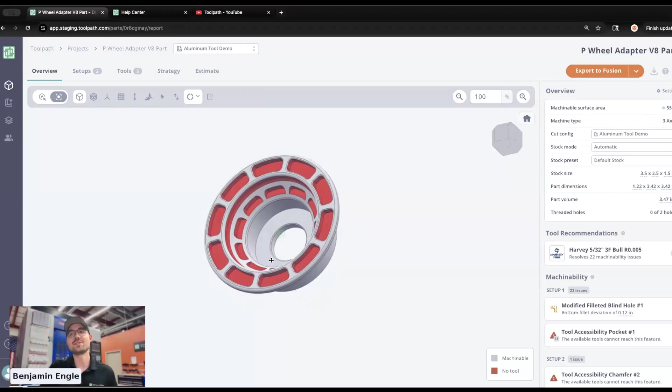But what Toolpath has also done is given me some recommendations. If I click on this, in this case it's a Harvey 5/32 bull nose, it resolves 22 machinability issues, which we can see highlighted on that part. And if I add that to my cart and regenerate, that part would go from 55% all the way to 100. So Toolpath is getting us the rest of the way there and identifying what tools are required.

So we figured out, can we make this part with our tools? The next question is, how am I going to make this part? So here I am in the setups tab, and if I click on these icons, these rotate my part into each setup.

Let's take a look at setup 2. I can see all of the features associated with each setup, and if we click into this face, it gives me an overview of the features. Now in this case this is just a face, so we don't have a feature depth or anything, but I can see what roughing tool Toolpath decided to use, as well as my finishing tool.

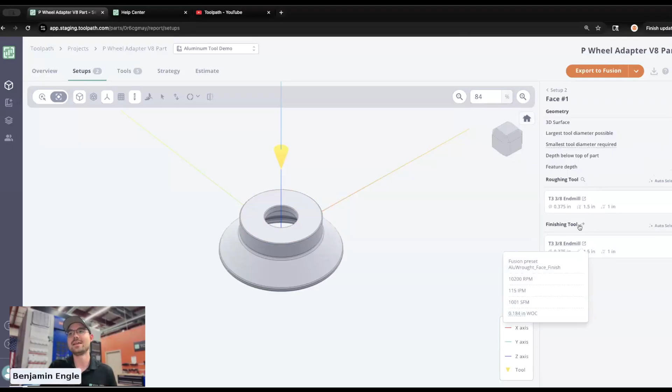And we're picky machinists, so maybe I don't want to finish with a 3/8 end mill. Maybe I actually want to use my 2-inch shell mill, because Tim would yell at me if I used an end mill to finish with, right? So I can actually tell Toolpath that I want to manually override that. In this case I'm not going to, because we'd have to click regenerate, but there's always that ability.

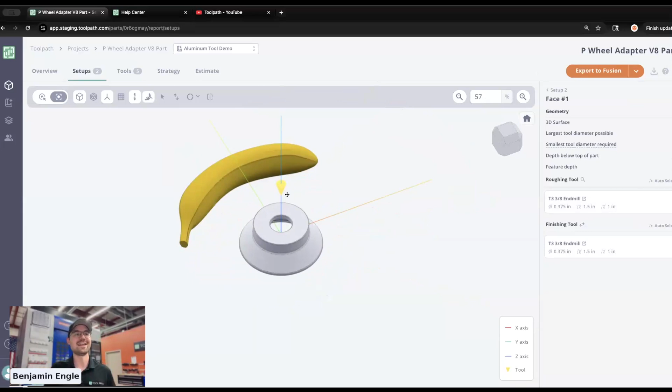And of course, we were talking about banana for scale. This is something we threw in during April Fools, just for one day, and then the next day we took it out of the product. Everybody was like, where'd the banana go? So that's sticking around. We even made a shortcut key, BS - if you type in BS, you can toggle on and off that banana. It's way more useful than you'd think, and it also gets a couple laughs, so I figured I had to show that.

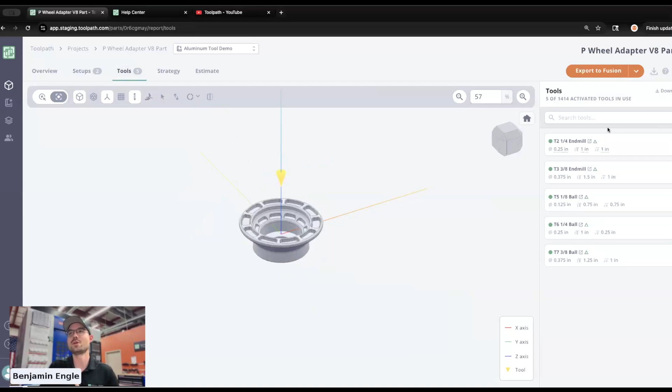Okay, so if we jump over to the tools tab, now we have a tool list of everything that is required to machine this part. And what I like to show here is we have over 1,400 tools available to us, but Toolpath is only using 5 tools, and it's using our preferred tools.

So that means that top priority, that preferred tool, means that it's already set up in my machine, which is really what I want to know, so I can make this part today.

If we jump over to the strategy tab, this is really similar to what you'd see when programming in CAM. We always take the tool and try to condense all the features down for one tool. Toolpath has already done that. We've got this 3/8 inch end mill. I'm going to expand roughing and see that we have 9 features that take about 6 minutes to machine, and Toolpath is hitting all of these features with this roughing operation.

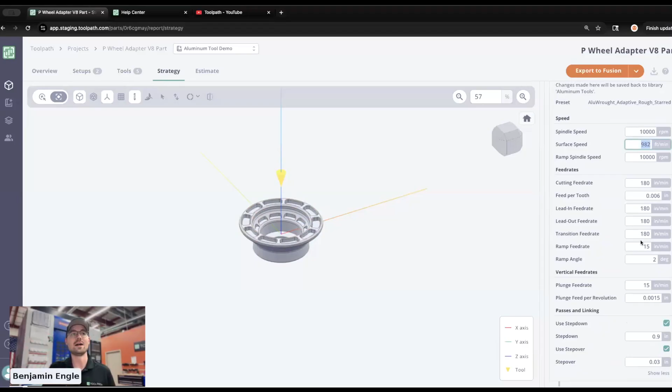Now, before I even send it to Fusion, it's pretty slick — I can actually change my spindle speed. Maybe I'm not happy with that surface speed for whatever reason. All these parameters, which look very similar to Fusion, you can change, and it will actually update that tool globally. So you don't have to worry about going back into your tool library and editing that parameter.

So that's a really nice feature. Okay, so the final tab is our estimate. If we have to get an accurate estimate for an RFQ or for our customer, this is where we're going to do it. The estimate page is really just a natural byproduct of everything I've shown you in Toolpath so far.

We know what tools we're using, we know the feeds and speeds and stepovers, we know how many setups. So now we can apply the machining time, and we can associate a cost with that.

And that cost is actually built from your shop, right? So on the left-hand side, we can see we have machining rate — that's going to be different for every shop, every shop's a snowflake. The production quantity that's required, as well as setups. We can define how much it's going to cost for each setup or an hourly rate, as well as a fixed or auto for the stock.

You have base costs — I don't want to take this job for anything less than 150. And you can also add additional costs like anodizing and maybe sandblasting fees or something like that.

So here on the — I need to move my Zoom stuff — here on the right-hand side, we can get a grand total, and this is based off of the machining time.

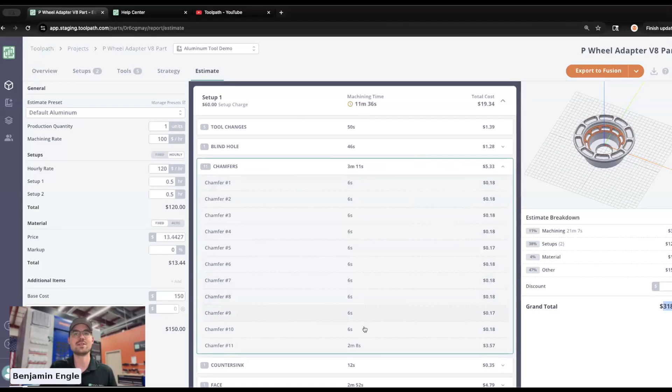So I can see in the center that setup 1 — let's just look at chamfers. Okay, chamfers are 3 minutes and 11 seconds, and that's going to cost me $5.33. But why are they 3 minutes? Well, these are all 6 seconds. Mostly chamfers are pretty quick, but we can actually see this chamfer 11.

It's this 3D surface, right? So it's picking that up, it's using our ball end mill. That's going to take an extra bit of time to machine. So you get a nice breakdown for the estimate there.

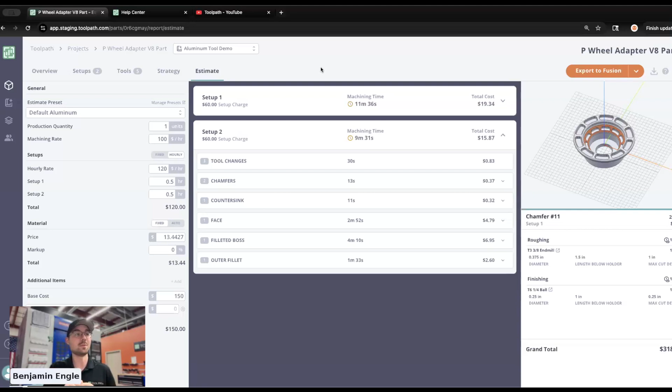So we've been able to answer what tools are required for the job, how am I going to make it, right, with the setups. I got to show you one more thing in setups — this is a preview feature, but it's super cool. We're picky machinists, and say we don't like the setup that Toolpath picked, I can literally just drag and drop.

So now this setup is actually my first setup, and I can just regenerate that. It's coming really soon, I'm excited about it. People have been asking for a while.

So, okay, so this is Toolpath, but I got to show you my favorite button — it's export to Fusion. So we're going to click on this. It's going to copy a special link to our clipboard. And I just realized you guys can't see Fusion, so now I got to stop share.

Thanks for working with me on this, guys.

All right, let's see — I'm going to have to share my whole screen for Fusion because you guys won't be able to see stuff otherwise. So here I am in Fusion. We have a Fusion add-in that lets us either send our part to Toolpath or bring it down into Fusion from Toolpath, and that's what I'm going to do.

Hey Ben, I'm not seeing it yet. Sorry about that, should have clicked share. Yep.

Again, here's our add-in that lets us either shoot the part to Toolpath or bring it down, and we're going to bring it down in this case. So I'm going to click part.

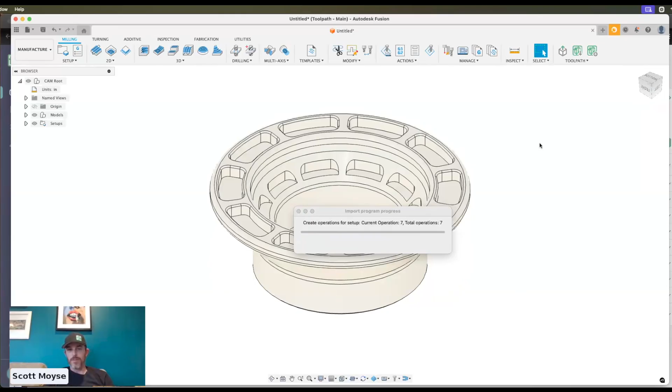Just for people, if you need to zoom in, here's a crazy tip for Zoom. Ironic given the name of the product, but if you click in the window that Ben's sharing, you can actually zoom in. There you go. I'm sorry, guys, I'll get rid of the widescreen for the next webinar.

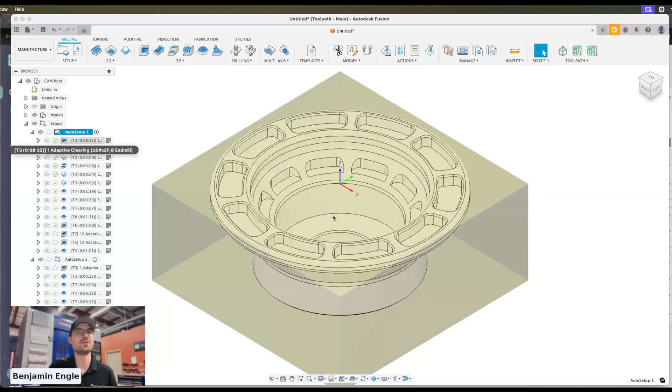So what Toolpath has done while Scott was talking is, in a few seconds, it brought everything I just showed you guys in Toolpath into Fusion. Here's our setups that have been auto-populated for those toolpaths. So we can see all of our operations. In this case, we got a 55% machinability score, so there's going to be some issues, but we were still able to send that to Fusion. And now since it's in Fusion, I have full editing capability of it as well.

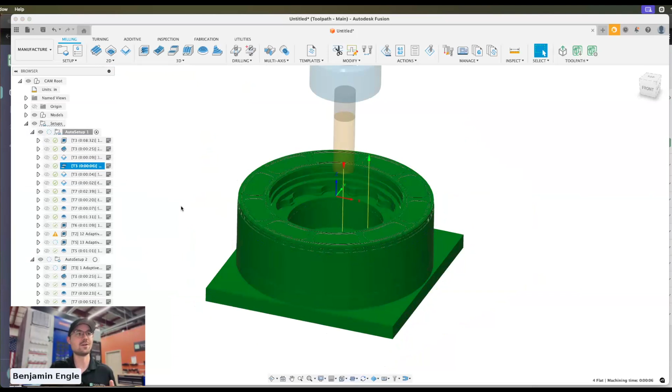So that's kind of a quick rundown. Hopefully you guys have a better understanding of how Toolpath works. There's a really fun story with this part, that's why Tim's on the call, and he's probably really eager to tell you guys all about it. So Tim, I'm going to shift it over to you, and you can give us the story on this part.

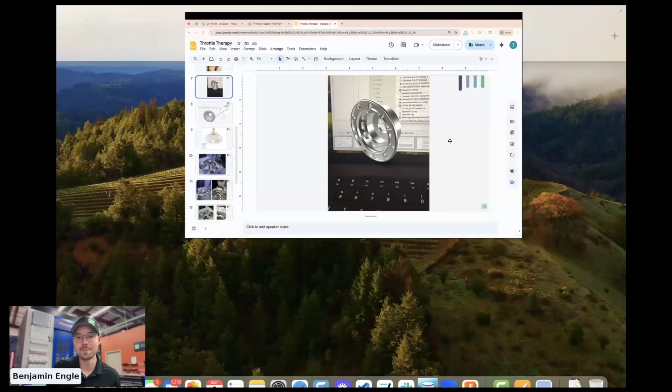Yeah, so I'll drop a little quick slideshow on you because I like pictures, I'm a picture kind of guy. So let me get that started. Ben, just give me a yes or no, the slides are showing, right? Yeah, yeah, you're good.

So this is a good longtime friend of mine from my bike shop days. He's running a race shop now, they basically prep race cars to do a ride and drive kind of program up here in Northern California, Throttle Therapy is the name. He's got some rad stuff they're doing up there. That's not really the point of the story though. He sent me a text: hey homie, I've got an SOS, I'm hoping you can help me with.

The rest of the story is that he has a really nice laser alignment system. When he bought it, he was told this kit will fit every Porsche that ever existed, for the rest of time, beginning of time, all that stuff. They lied, or whatever the case was.

So he needed an adapter to go from this fancy knockoff type lug nut to this. I was like, if I got the material and the tools, yeah, I can knock that out today. I was planning on going out and machining something in my shop to kind of bang on Toolpath anyways. So the funnest part of the story, I'm going to get straight to the punchline: from the first text to being ready to go out to the machine, and that included a follow-up call, several text messages, him taking some measurements, that whole process was like 52 minutes.

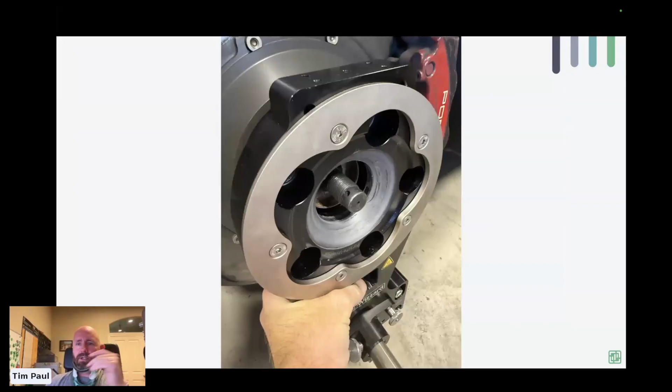Basically we needed an adapter for that. If anybody doesn't know, especially if you're working back and forth with designing parts for customers, I just had a brain fade, Scott Moyse, help me out. In Fusion you can save out as a U something, USZD or something.

What is this, Scott? Help me. Something, yeah, U3Z or something like that. It's just, I forget, hang on, anyways I'll find it, I'll show it when I get to Fusion. You failed me Scott, I'm moving on. USZD or some crap, I'll pull it up in Fusion in a second.

But it's pretty cool, you can send someone a file, text them, they got to be on an iPhone. USDZ, thank you Daniel for the win. You can send them the 3D file, they can open it on their phone and place it on here on their laptop, right? So that was just a fun little part of the story.

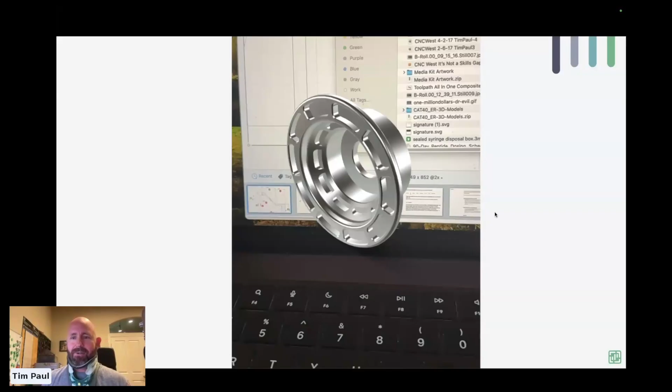I ran this thing through Toolpath. I mean, I designed the thing, so I know what tools and material I had, so I got 100%. This was the beginning of some of the tool paths.

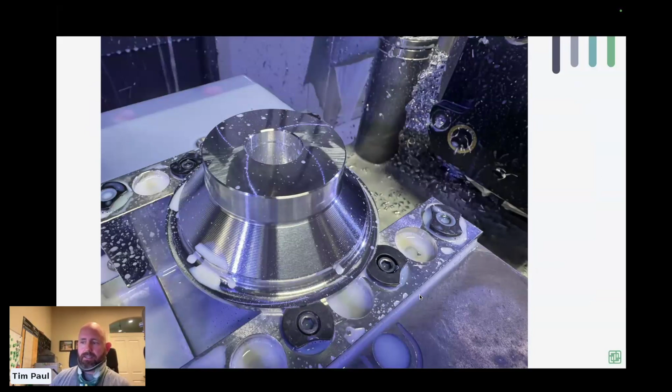I held it in my Chick OneLok vise with Versa grip jaws. Apparently I'm getting nervous because John Saunders is on the call, just kidding. So I held it with some Versa grip, little Mitee-Bite grippers.

And then flipped it over for the soft jaw on the other side. I probably had more time into finding this little logo for Andy's business and playing with the logo in the pocket than I did the rest of the part.

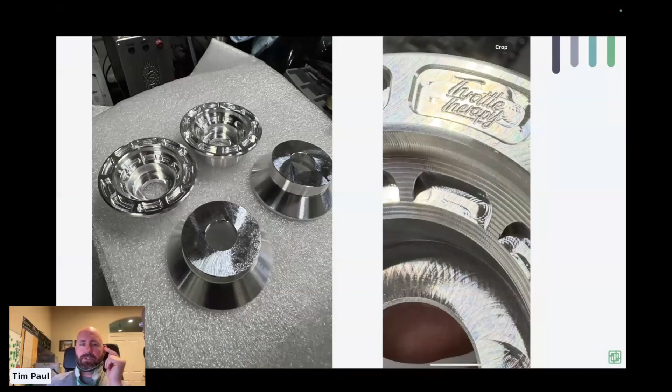But the really interesting part of the story for me, this is what they do. This is how they adapt the laser alignment fixtures, and that's the car. So let me get over to Fusion and start talking about the rest of the story.

Now the interesting part of the story for me is 52 minutes from a text message to being ready to go out to the machine. I still can't load tools in my holder or run my machine. For anybody that doesn't know, I had a real serious accident back in April. I busted my neck and back up pretty bad and dislocated my head.

Lucky to be alive, but I wasn't able to run, and I'm still not able to run my machine. So Carol, my fiance - anybody that didn't know that, that's breaking news - she's been running my machine. So I was like, Carol, let's go make some parts. And she said, man, it's almost 100 degrees in the shop.

So the only thing that kept this thing from being done start to finish in probably 2 hours was that we wanted to wait till the next morning to machine the part.

And the interesting dynamic for me was that I've made a really good living for quite a few years basically micromanaging toolpaths, making toolpaths cooler than anybody else's. And then now that I'm sitting around waiting for it to cool down, I started micromanaging these stupid toolpaths.

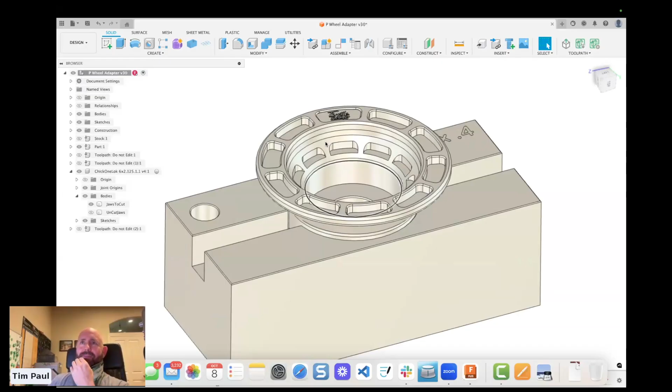This is a conversation that John Saunders and I briefly had, a comment he made was that it's interesting - the first instinct is like, well, I want it to program just like me. But it doesn't always do that. We make some logical decisions. A lot, to be honest, are decisions I've kind of made as a starting point for how Toolpath is going to machine parts.

And what I found is I started rebuilding surfaces and doing really dorky 3D Toolpath stuff. And then about an hour into that, I was like, what the heck am I doing? I'm just going to go do something else and machine this thing in the morning.

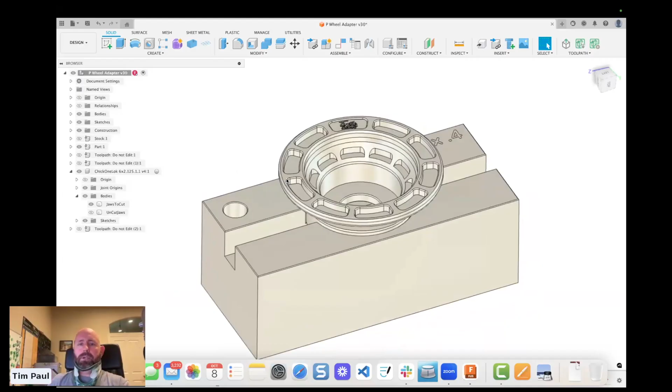So here's a quick overview of the part. We've already seen the part, but the plan was on the first operation, we'll hold it like this in those Versa grips, and then hold onto this in the second operation with some soft jaws. If there's time at the end and anybody wants to see my soft jaw workflow, we can dig into that, maybe I can do a little geek tips video about it too.

But I thought it'd be interesting to go from here. I'm not going to give you the whole walkthrough of Toolpath, but from here, I have very specific stock that I had to fit this in, so I wanted to show that as well.

Basically, I had this round stock from another job that I had remaining. So I went in and modeled the stock where I wanted it to be, and then I went over to the manufacturing side and just made a setup, because on this example I wanted to micromanage a very specific setup for the first and second operation.

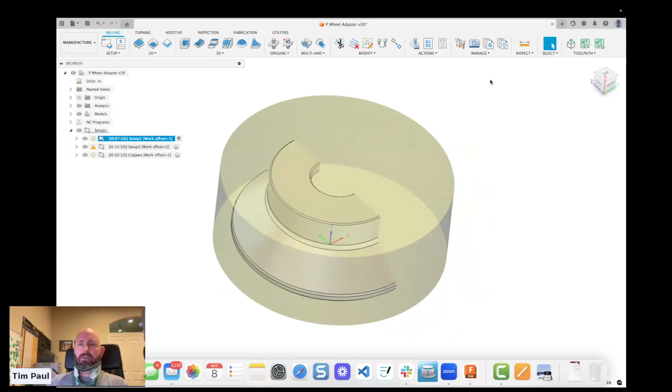So from here, I sent over to Toolpath, and then we can switch over to my browser. And that's not what I wanted to show you. So we don't need to watch this process, right? That's staging - I should be fired.

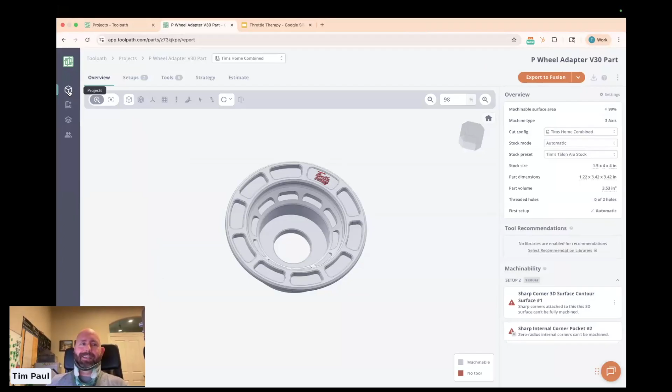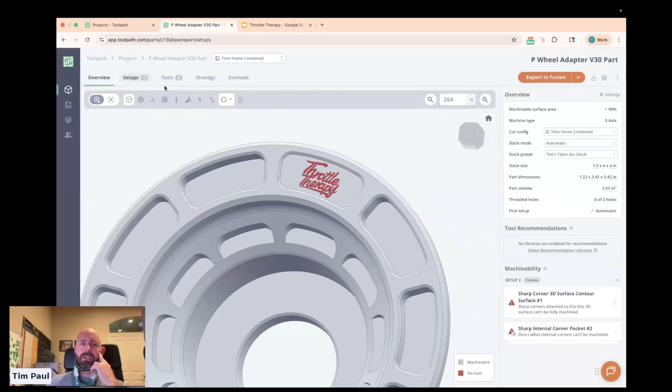So this is what I got here. Because I made this one pocket shallower than the one I sent Ben, and I added some logos there, I'm getting a 99% machinability score. I don't even want to mess with this. It could recommend me a tool for those tiny little features, but I know exactly how I want to machine those, and I know what tool I want to use.

So kind of my workflow is to go to tools. I skim through them, make sure there's no surprises, nothing weird I totally disagree with, and I don't see anything there. You could definitely go through the strategy tab, but Ben already showed you that. There's a little preview that I probably shouldn't have turned on for everybody - pretty soon you're going to be able to see toolpaths from the strategy tab. And then the estimate, it's my buddy.

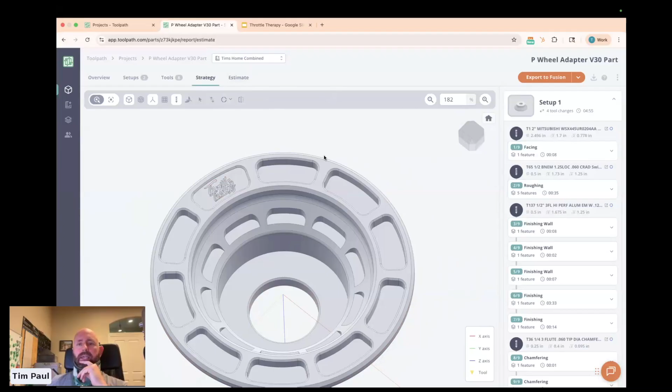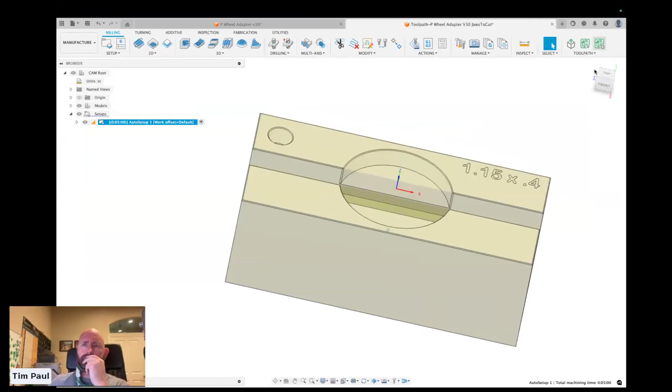So from here, I would export over. Actually, I think I need to grab that export key. Then I would come over here, and the cool thing is I have a decision: I can bring this back into the current document or dump it out to a new document, because I like to play with this separately. I'm going to do a new document. If I was running a job shop, I would just bring it into that existing document. Apparently I grabbed the softjaw key, so let's go back, do the export key here, come back over here and do this. Yeah, I must not have clicked on that.

So now what we're going to do is I'll walk you through exactly what I would do, just to give a walkthrough of the toolpaths. I'm not hiding any little scabs that we have, I'll show you how I would navigate those.

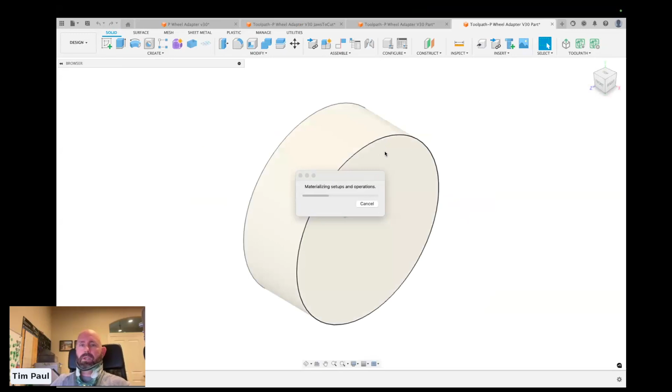And while this is popping in, Scott or Ben, is there anything we want to answer live, or anything you want me to address before I move on? I think we're okay, I've answered the questions I've seen come through so far. Okay, great, yeah, great.

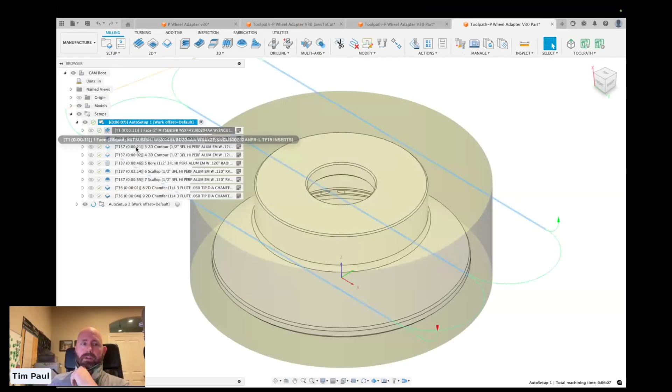So I have this weird Fusion bug that I'll share. Well, of course now that I do it live, it's not there. For several weeks, I couldn't click on these toolpaths without going over to design and then back to manufacture. So if you have a weird bug like that, try that.

So there's a couple things I would do here. The first thing I would usually do is just click down through here. I don't see anything crazy that I don't like, that all looks good to me. So that is very, very close, if not exactly how I'd program the first operation. Next thing I'm going to do is go to simulate the whole setup.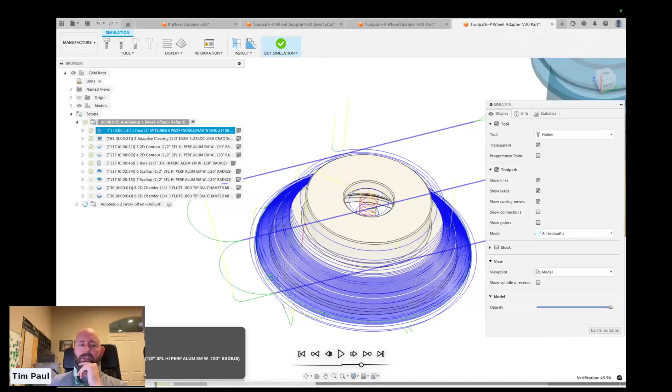And then what I do is I look for little red tags down here in the timeline. I very rarely actually watch the simulation, but I do see a little red tag there, so I'll click on it and zoom in to see what's happening. I see exactly what's going on here.

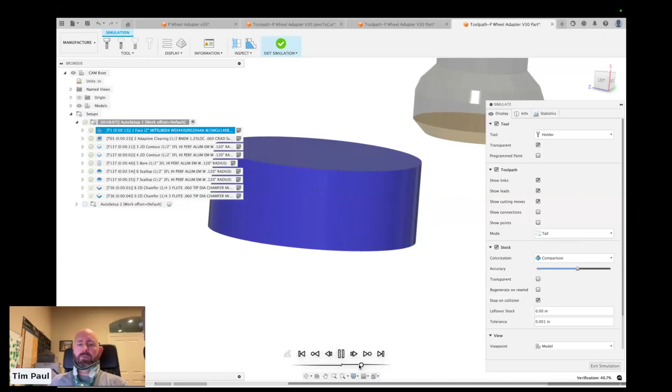So if you do a simulation, turn on stock, I would usually go to tail for the toolpath type. I always turn on stop on collision, but then when you do this I almost always just go full throttle to get to the stop. And what's happening here is we have a bad bottom height on the adaptive roughing.

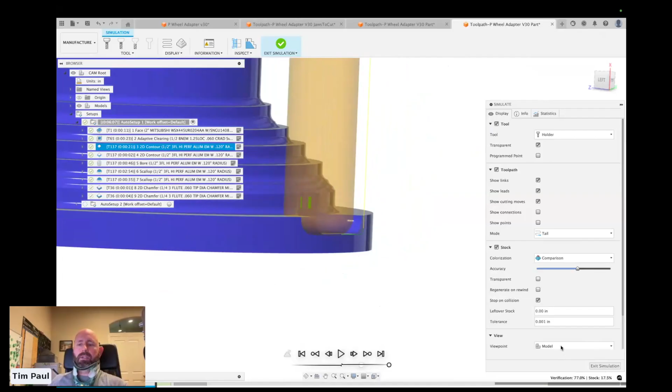I've already recorded that, I've already logged a ticket and that should be fixed here real soon. So that's basically what happened, we're going in to do a... computer seems to be running slow.

So I just need to come into here, and my bottom height is just model bottom. I need to change this to model bottom minus tool corner radius, and I'll do another 10 thousandths of an inch. So hit OK, that'll regenerate.

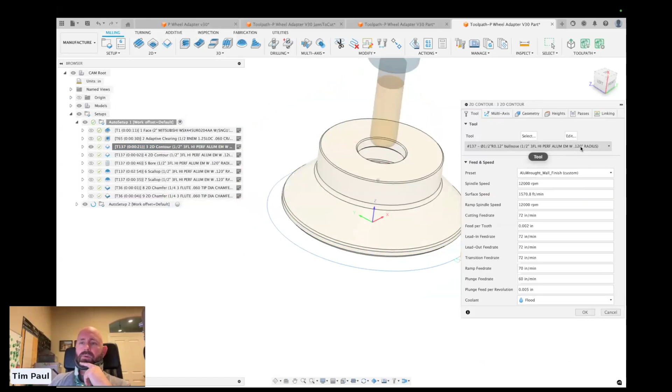But what that'll do is give a little extra clearance to the 2D contour, because the 2D contour is set to the model bottom minus 125 thou. And if we look at the tool, we have a 120 thou bullnose tool, so it's just going 5 thousandths past that, so we'll have a 5 thousandths clearance there. So from there, that side of the part is ready to run.

Now, one little tip is all of our 3D toolpaths for now are being output as scallop toolpaths. That decision, honestly, I pushed on pretty hard for now, because scallop is a really good toolpath to do pretty much any geometry from, steep surfaces, shallow surfaces, segment geometry. So as a starting point, we'll do that while we make sure we're getting good containments, good height containments, good tool selections.

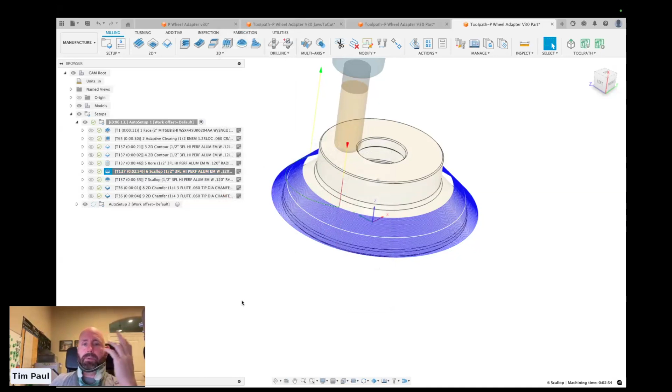And then it's very easy, if you were like 'I would use ramp on that surface,' to just right click on that, create a derived operation, and go to something like ramp or any applicable toolpath. One thing I see is anytime you're machining like a segment of geometry, the smaller the segment is, the smaller your tolerance should be.

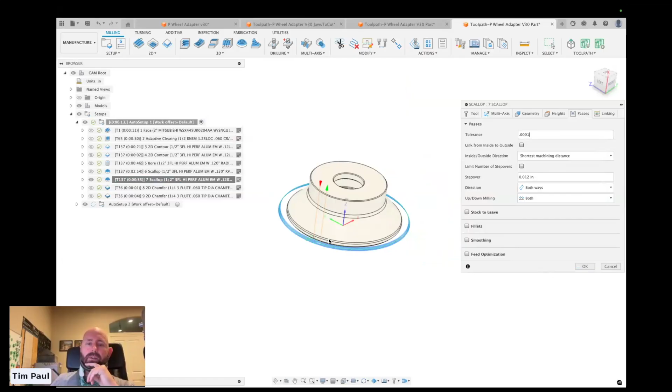So if I'm doing a small segment geometry like that, I would often come over and make my tolerance really small, because it'll smooth out the waviness there. Maybe I want to micromanage and change this to some other toolpath, but if my job is to just get good parts out, then I would just do that and move on.

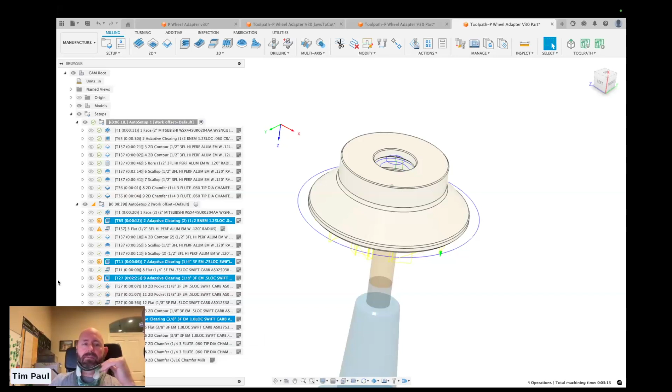Now, what I did do when I went to machine this is I actually wanted a more aggressive toolpath, it's hard to see in the webcam, because I wanted it to look more fun. So I went and made the step over quite a bit bigger.

All right, so moving on to the second operation. I'll pause for a second. I see a lot of good commentary that I want to read, but is there anything we should address before I move on, Scott or Ben?

We've got some hand raises. I'm not sure how to address them right now. Do you guys want to speak, or did you just have a question? I'll wait to hear back from them in the chat. We should probably start Q&A, dig in a little bit more. Let me wrap some of this up, share the new features after you're done with that, Tim. Yeah, perfect, let me wrap this up real quick.

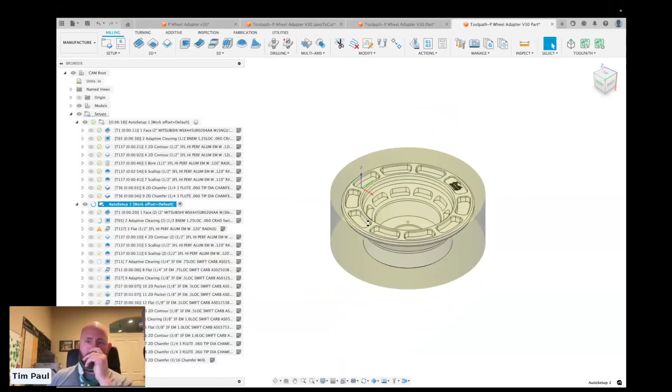So a couple things here, I don't need to go through all the toolpaths. We did have another bug that I found here. We're trying to do this transition as a flat, and it actually machines the full geometry because it uses the scallop that goes all the way up, and this wall comes all the way down. So it is fully machined.

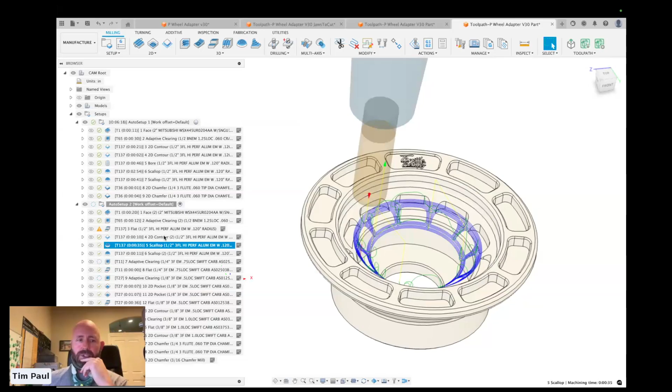But that's basically my workflow, I just go down and see if I see any problems. I would actually delete it, but I'm in the habit of suppressing stuff because I report bugs and problems. So anyways, that's the part.

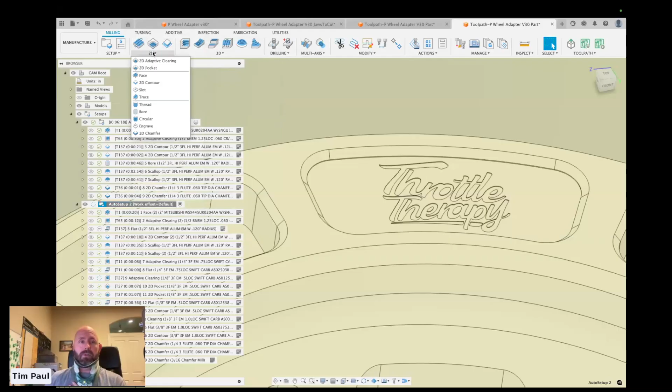For anybody that hasn't used Engrave, that's what I use here. I went to the setup, went to create from template, and then I did this Engrave. Actually, no, I didn't, I lied, that's usually what I do. But this, I use this Engrave operation.

And what I did there is I just picked these and let it engrave. The cool thing with that is you can get these little sharp corners and stuff like that. So, it was a pretty straightforward, simple part.

The last thing, the only other, so I had to add two toolpaths, one for the fancy engraving, and nothing comes off my machine without being fully deburred in the machine. So I did use an extension toolpath, which is deburr.

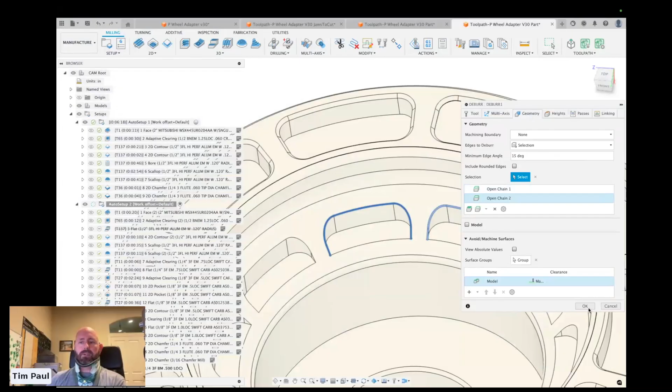I'll just show you real quick how nice and simple that is. I went into a ball mill, picked this ball mill, and then all you have to do is on the geometry tab, I actually selected the chamfers, I just went around and picked them all. And then what that does, it just hits a ball mill and gives a little tenth edge break on them, or whatever you have your default set at.

So that's the story of walking through the part. Now, the big personal moment I had was, like me and many of us in the industry as we're looking to be more efficient and more productive, I need to start thinking through, like, I've been rewarded for hyper micromanaging toolpaths. And now, this made a very good part. It was 2 hours total to make 4 parts from design, from the first text to the finish. And I spent an hour waiting for it to cool down, micromanaging toolpaths. I ended up deleting all those and just running the part.

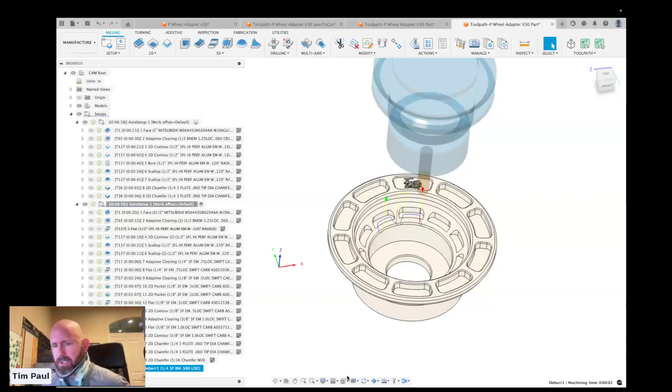Yeah, so I'd like to answer any more questions that people have. So I can't see the comments anymore. Yeah, I'll watch them. But I also wanted to show some of the new features that are maybe a little bit more power user setting stuff.

Looks like Joshua raised his hand. I'll let you guys deal with that. But so if I jump into cut configs, Joshua, if you raise your hand, you disappeared off my screen. Joshua, if you raise your hand, I'll allow you to talk. Oh, there we go, yeah, go for it. What's up, Joshua? There you go. Asked to unmute, so you got to unmute yourself. I just asked you to unmute.

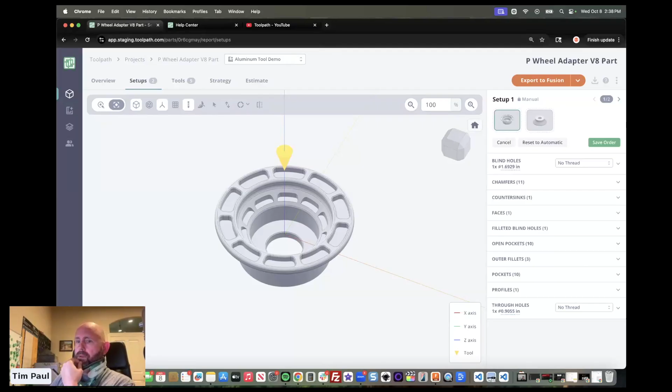There we go. Hey, you should be unmuted. I think I hit that by accident. Oh, no problem. Well, thanks. You have any questions while we have you? Got him on the spot. No, okay. All right Joshua, thanks, cool, no worries.

So back in Toolpath, I just want to show a couple things. I did show the rearranging setups. I think that's super great.

Jumping into cut config, so if I open up this aluminum demo. I talked about tool libraries, but really it's a cut config, and we've kind of created that new term. A cut config is like a smart tool library, or you can have multiple tool libraries defined for Toolpath. What we've done in cut configs, if you're familiar with them, is we've created a basic mapping versus advanced mapping, which advanced mapping was actually what you guys were familiar with. So let me show you the new mapping here.

So if we're looking at this 8 tool library here, these aluminum tools, let's click on our 1/8" end mill here, and I can see everything about my end mill. Looks like my flute goes all the way up to the holder. But if I click into presets, you'll see something kind of new here, and we're trying to make this a lot simpler for people to understand.

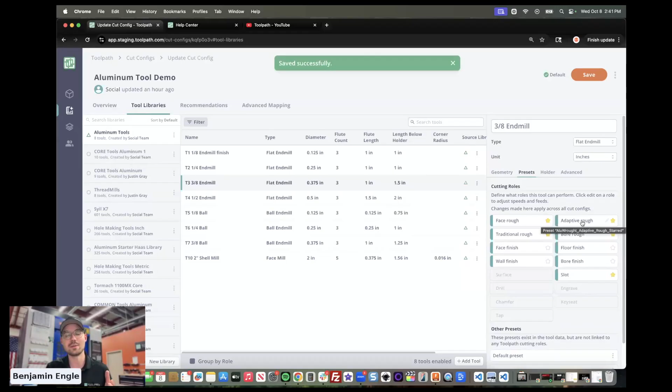So this is kind of how you can get Toolpath to work the way that you want it to, and program and think the way that you want it to. And then if you want to change any of those values, you just click on the edit cutting parameters, and then we're right where we know and love. We can change our spindle speed, surface speed, cutting feed rate, and all that.

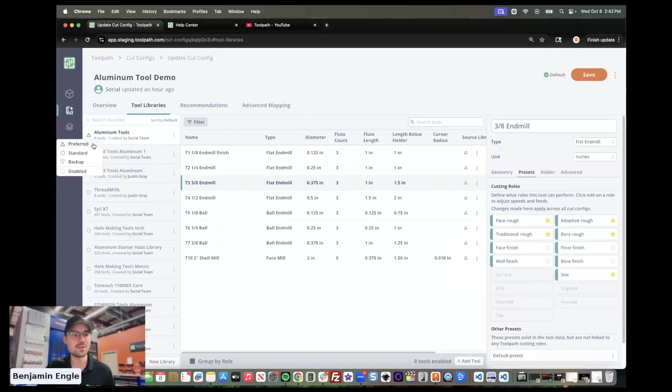So that's a new improvement to Toolpath that I think will help people understand when they're setting up their libraries, because in a cut config you can have multiple libraries. So here's my aluminum tools, and I've set it as the highest priority level, so if I'm programming a part, I say Toolpath, look at this library first before you look at anything else. So if I have this additional library selected, I'll set it as my standard. And then we also have a backup tier.

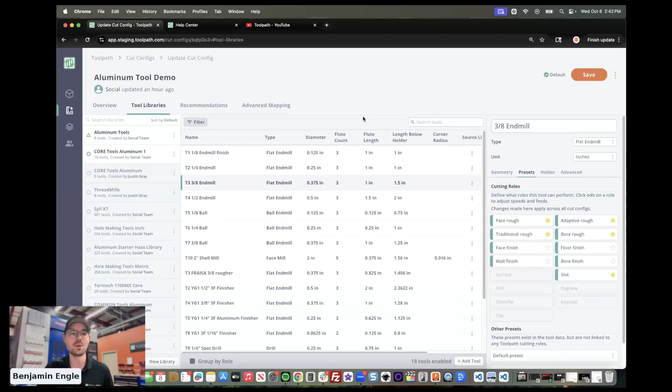So you have 3 different levels, and Toolpath is going to look at your first library. Then it's also going to look at your top priority cutting rules, so it's going to look at these stars. And once it's exhausted those options, it will only move on to the next library and so on. Additionally, we have tool recommendations, that's the same as it's always been, but we still have that layer where we can add either vendor tool libraries or even our own libraries. So Toolpath, we have a couple of drill, metric and inch libraries, as well as taps. You can just turn these on, and when you run your part, Toolpath is going to look at your tool library, and it's also going to say, okay, I can machine this much with these tools, but here's actually some recommended tools that I'm allowed to look at.

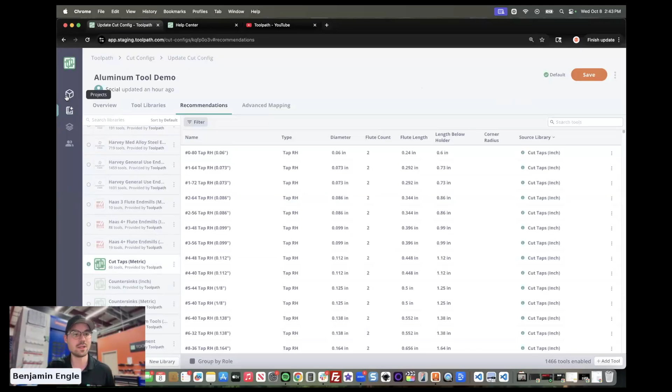If it's a vendor tool library that we supply, you can click on the link and go buy it. For Tim's part, I'll click on this Harvey tool, go to the Harvey tool website, and grab that tool and order it. That's the coolest thing—you don't have to dig through catalogs over and over again. That's one really big improvement we've made.

Tim and Scott, is there anything specifically that people want me to go over? I'm not looking at the chat right now. Yeah, I've been answering some questions. I'm also trying to catch up on them. Anybody want to raise their hand and unmute yourself?

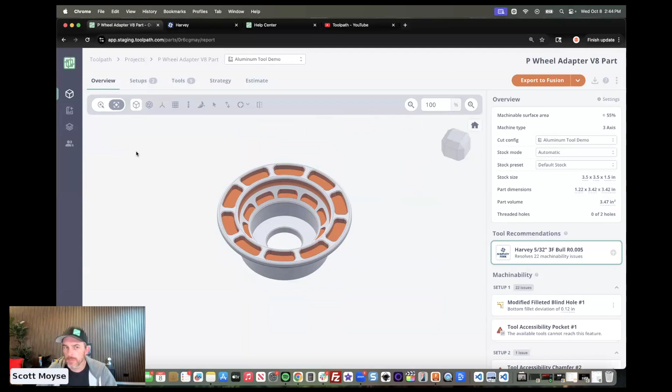Feel free to. Maybe just show how to add additional line items on the estimate. I was getting to type that in.

Good call, Scott. If we jump to the estimate page, on this left-hand side we have a lot of different things that we can change.

Additional items are kind of your one-time costs. Say you have the cost of a tool you want to keep track of—you could call this our roughing tool or something, and add the cost associated for that, say $65. That goes into other, and that's a one-time cost that doesn't get multiplied over the production quantity or anything like that.

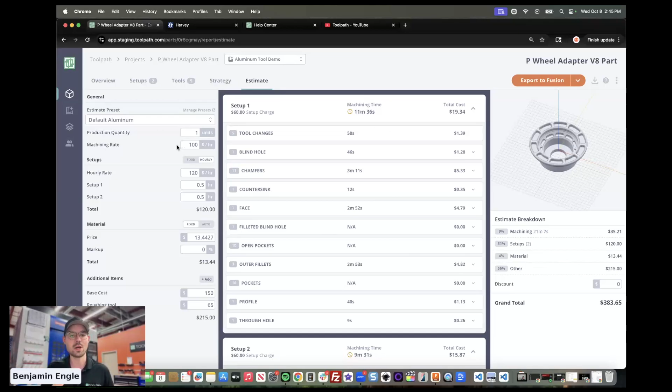I saw there was a comment asking about tooling costs, and I think that's one way you could navigate it—adding the tooling costs into the additional items.

There's a little more talk of, do we want to essentially add a per-item cost? Staying with tooling—maybe I know that for every tool I burn up because we're cutting Inconel or some gnarly stuff, I burn up $80 in tooling for every part. We're looking at adding a per-part cost.

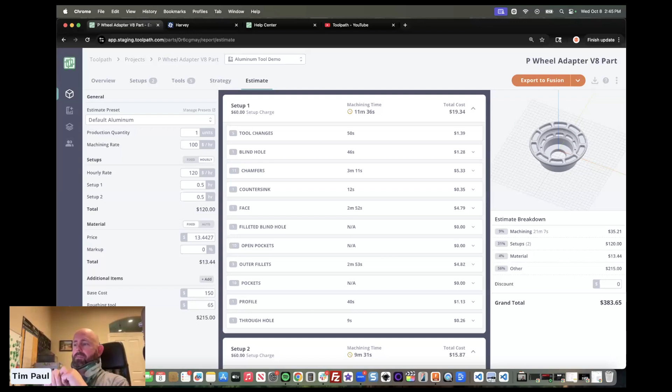Ben Sam asked, can you show a quick workflow on how you would utilize the recommendation tools? Sure, let's go ahead and pull in this—this is an old webinar part.

Let's see, I think what I'll do is real quick go into cut config and create a new cut config just for Sam. Instead of uploading our own tool library, which we can upload a Fusion tool library, I can just create a new library and add tools to it. I'm just going to put one tool in here and add some automatic presets to it—so here's our flat end mill.

And now recommendations—these are all the tool libraries that we can recommend to you. So we'll do some Kennametal, Harvey, and Haas. We'll click save, and that's all I'm going to do.

There's a bunch of other things I could do, but I'm going to jump into this part now, and we're going to look at it with our Sam cut config—our tool library that we just configured. So it's going to look at this part now, and I only gave it one end mill of my tools, so I have a feeling it's going to recommend a bunch of other tools, and I think that's probably going to help us understand how this works.

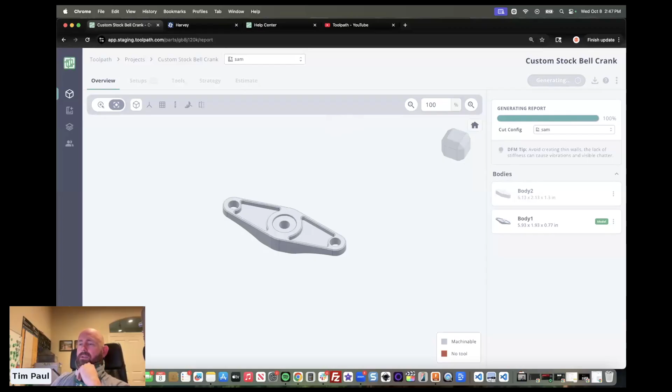So Matt asked, how is Toolpath suited for low mix, higher volume work? Programming is for new products and modifications to existing products. Just to be super honest, our real sweet spot, fastball down the middle, is kind of the opposite of that—it's more high mix, low volume. I have some workflows for spreading it across using patterns and stuff.

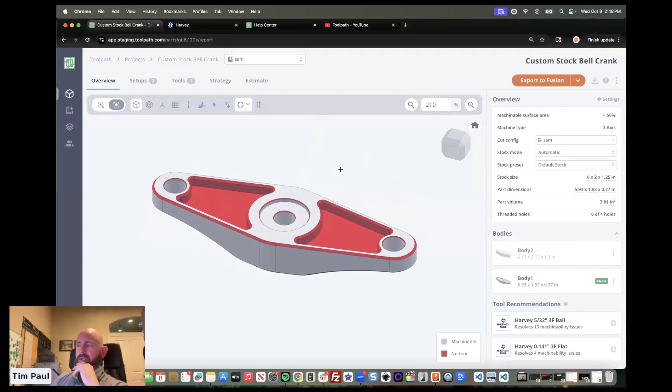I think high volume is a different definition for different people. Some shops see 100 parts and that feels like high volume, whereas to me high volume is where you're just running weeks and weeks at a time. John makes a really good point though—we do talk to some production shops and they are using Toolpath for fixtures and the onesie-twosie R&D stuff, where it gets you that much faster to your production part because you're like, I don't want to program a fixture for this.

So then you're holding it kind of silly and stuff. Yeah, good call out on that, John. Thanks for stealing my answer. Sorry, Tim. No, that's perfect. Sam, going back to Sam's holding part.

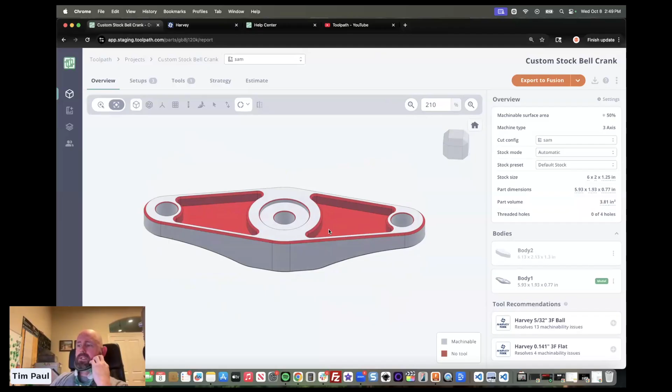I do think having a starting point, you'll make that first part while you start programming the rest of the job. There's a lot of ways. If there's any low volume stuff you're annoyed you have to program, I think Toolpath is a great fit for that.

So let's look at Sam's part here. I have one tool. This is actually pretty interesting. I can machine about 50% with just one tool that I made, which is kind of cool.

But what's really powerful here is now we have two tool recommendations. If I click on this, it's trying to use a ball mill here to do our chamfers, probably because there's no chamfers in that library, as well as a smaller 141 thou 3 flute end mill to get into those pockets.

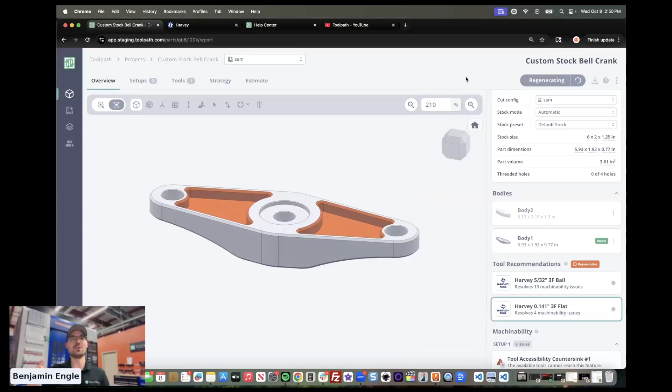If I were to select those - let's actually do this since I think he wanted to see it - and we click regenerate, I go from one tool to now three tools, but now I should be able to machine, I'm assuming, probably the whole part. Is that kind of what you're looking for, Sam?

Hopefully. I'll chime in if I see it. Yeah, I think that answers what we're looking for.

There you go. It's actually pretty incredible - with just three tools, we can machine this whole part. Two of them were recommended to us by Toolpath.

So I guess you can use tool recommendations in a couple of ways. You can have a nice library that's part of your shop - maybe you have 100 tools, 20 always set up in the machine, 80 at your disposal - and you just use the tool recommendations as a backup. But in this case, I just had one tool and said, Toolpath, you figure out how to machine this part. So there's some unique ways you can use it.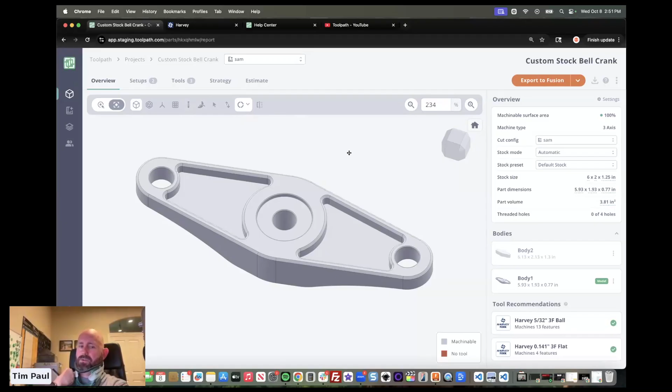I'll jump in real quick before the next questions. I have a buddy who's been a long time Mastercam programmer, and he does pretty gnarly, high volume parts. Right now he's using Toolpath to find weird DFM problems that would screw him later, and to basically sort out what tools he needs, so he can get a head start, basically for free.

The last question I saw was: if you didn't want to use a ball mill, how would you switch to a chamfer mill? We didn't have a chamfer in that library, even in the recommended libraries.

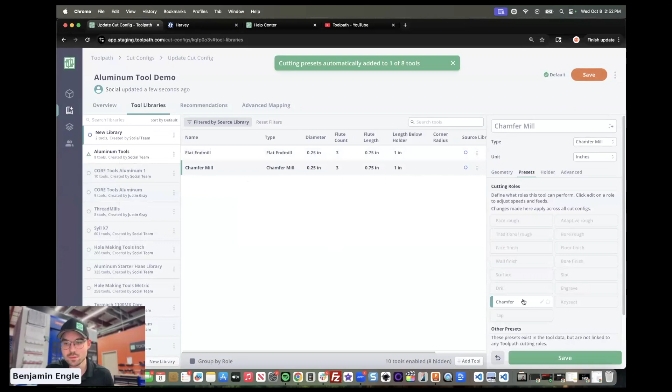So let's just see what happens. I go to save this - I might actually have to. I think the next question was similar. The bottom of your screen's kind of... oh, hang on, this is my fault, I've had it zoomed in the whole time. So let's see what actually happens when we rerun this part.

Another quick tip here: if you change something about your cut config and need to regenerate your part, these three little dots let you click regenerate. And before I do that, we actually added another feature - a guided tour. So if you have a question about Toolpath, this guided tour should help you with that.

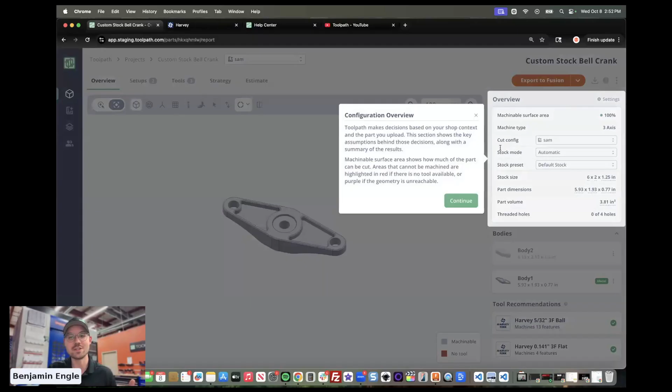We additionally have - and it's not showing up, which is kind of strange - a live chat that's not AI. We're an AI company, but we're trying to be as human as possible, so it's actually me, Scott, Tim Paul, everybody on the call. You can talk with us anytime, unless we're asleep.

If I click - it's not showing up because you're on staging, that's all. Oh okay, thank you. Yeah, so it just appears in the bottom right hand corner, and you can move it around on screen as well. You can grab the little handle and shift it around if you need to get it out of the way.

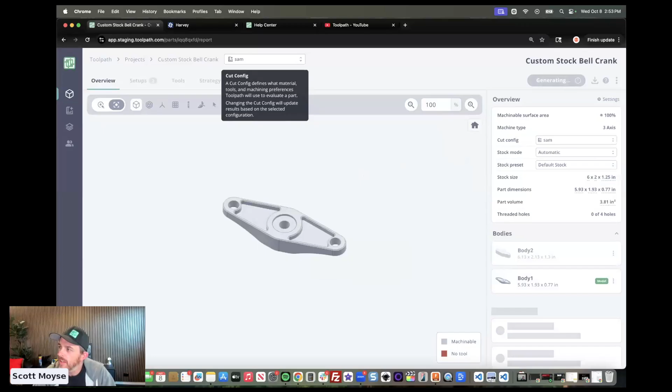While that's regenerating, Tim has a question - another Tim. Are the additional line items persistent if the part is regenerated? So on the estimate tab, when you add those additional line items, if you regen, I'm pretty sure they will. I wasn't entirely certain if you change the cut config whether they remain persistent or not.

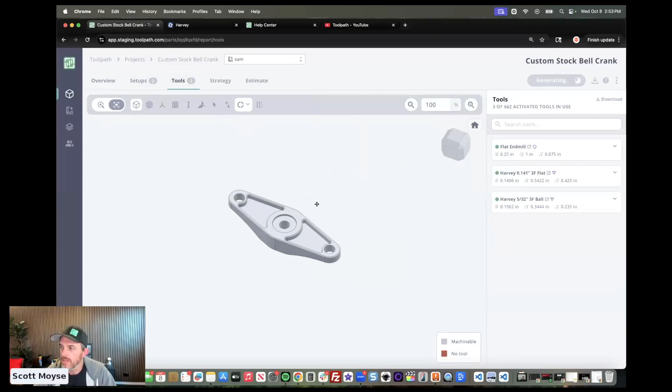I'm guessing if you've got a different estimate preset applied to your cut config, then it may change those line items.

One thing I didn't explain is an estimate preset. I'll go to manage presets. We can build an estimate preset based on our machine and also our material. If I click estimate preset, we've got tool change time, base cost, machining rate, as well as cost per setup, and then the price of our material.

In this case, we've got 360 brass on our Brother Speedio. It's going to cost this much to run because we know the price of the material and what machine is going on.

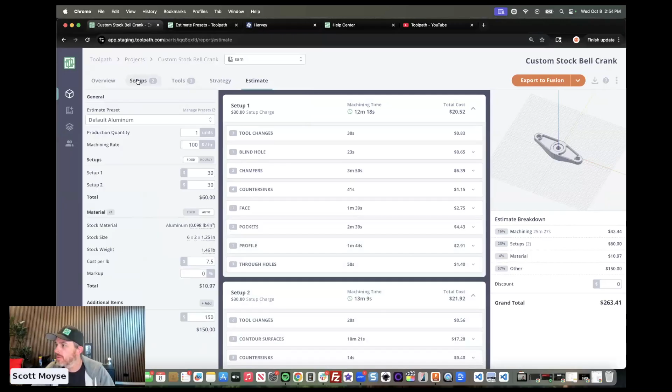We'll have to check your question specifically, Tim, for switching between cut configs to see whether it persists. I'll email you — I think we'll have your email so we can let you know.

So this is kind of interesting — that was a really good question by Eric asking about the chamfer tool. It looks like even though we have a chamfer tool in our library, it's still selecting our ball nose. I'll have to dig into why, but if I had to guess, it has something to do with not wanting to do the extra tool change, and possibly a priority setting too. But that's a good one to note.

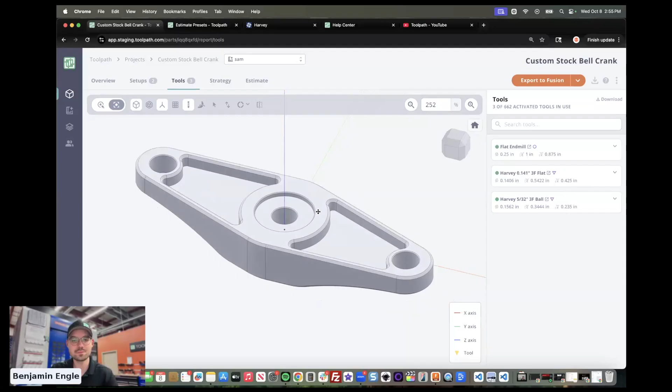Do you happen to know why, Scott, it might be doing that? Can you remove the tool recommendation? Maybe the Harvey tool recommendation is overriding it. No, just go back onto the main tab and deselect the recommendation at the bottom there. Yeah, I don't know. Good question though.

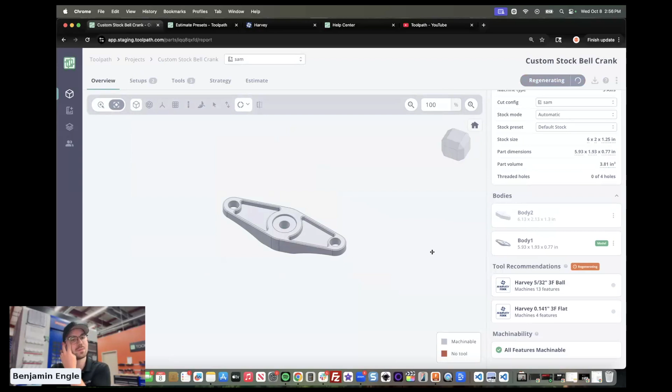Anything else? We've got about 4 minutes. I'm happy to stay on the call — I love talking about Toolpath and digging into the details.

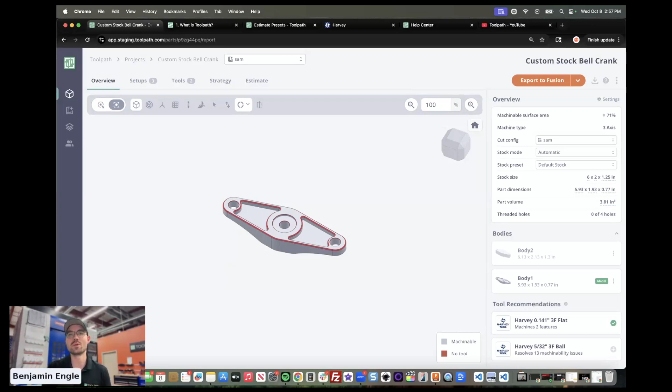Yeah, it looks like it didn't select my chamfer mill. I'll have to look into that.

I'm not saying the issue is here, Ben, but I recently had a chamfer that I've been doing for workshops when I was at Autodesk for, I don't know, 8 years now, and the chamfer ended up being like a 47-degree chamfer or something. I reported it as a bug, and several weeks later Justin came back and said, 'Hey, go check your part again.' I'm not saying that's what happened here, but we should do a better job of reporting why we made that decision. Anybody looking at the Geek Tips stuff on YouTube, I'm happy to take requests for specific topics.

I also say, those tooltips that pop up - if something in Toolpath makes you feel like, man, I really wish there was a tooltip here that explained this better, what would be a good email to send, like hey, could you do a support tool? Support at toolpath.com, I'll put it in the chat. If there's anything making you feel like you had to bang around just to understand this, there should be a good tooltip that explains it. So just send us an email, be a part of making it better.

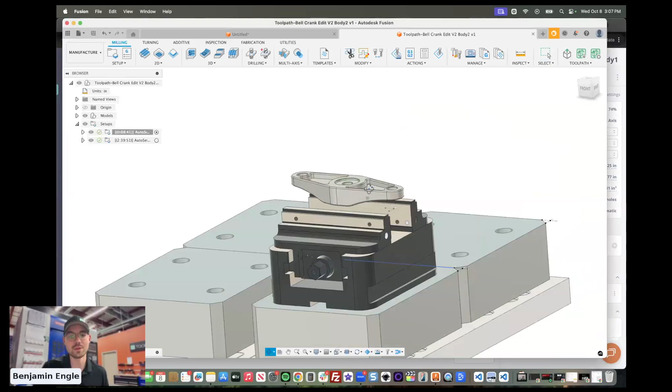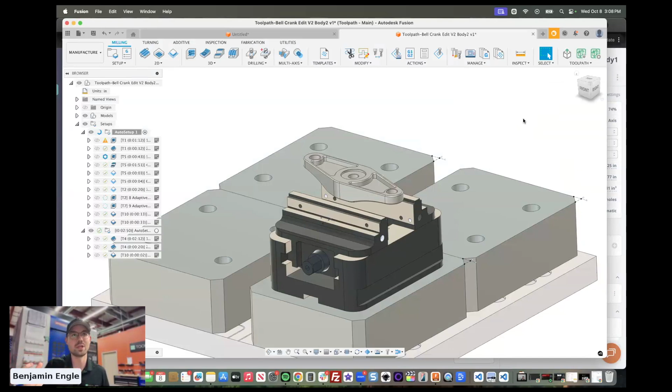Harrison, if you're still on the call, I've got to show you this. This is what we were talking about. If you have your work holding and stock and everything set up, I'm going to delete these toolpaths that actually came from Toolpath. Here's my setups. In the background, I've sent this to Toolpath, and by clicking copy the part key and import to current document, it's going to auto-populate those setups and everything inside that existing document. So it's taking into account the work holding, trying to stay away with collision avoidance, all that stuff.

So that's our current workflow, and I suspect it will be very similar for 3+2 machining. Hopefully that answers that question.

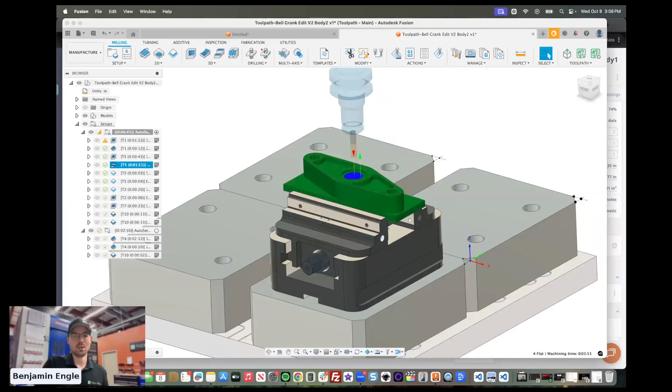I'll stay on for another 12 minutes. Just to say, didn't I just see a 2D contour chamfer cut around the outside of that part just then? That was a different tool library. Yes, you did. Okay, so there's some investigation that needs to happen why I didn't get a chamfer on the other one. For the record, I have chamfer mills in my toolkit config, and I get chamfers very often, just not always when I expect them.